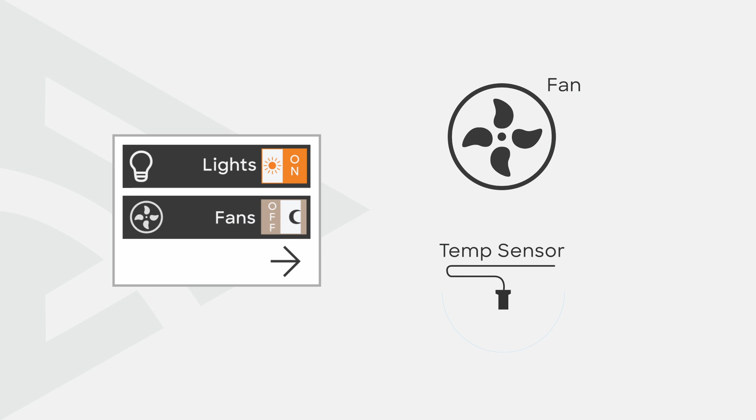By constantly monitoring the temperature underneath the hood with temp sensors, the controls will know when to lock the fans on and when to automatically turn the fans off. First, let's look at an example graphic to help demonstrate how these 4 set points work in real time.

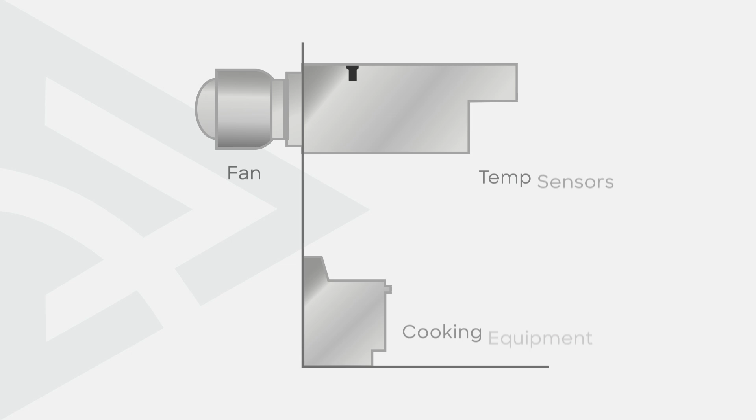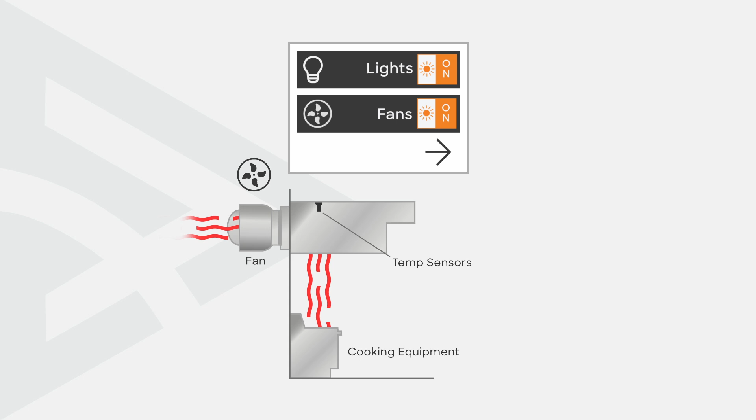Here, we see a hood with a temp sensor over a set of cooking equipment. With nothing on underneath the hood, the fans are free to be turned on and off via the fan button on the touchscreen. Once the cooking equipment is turned on underneath the hood, the temp sensor values begin to rise due to the hot air underneath the hood.

At all times, the temp sensor values are being compared to the room temperature. In this example, there is no room temp sensor, so we're going off a preset room temperature. If there was a room sensor, this value would change depending on the value the room sensor is reading.

Again, the fans are still free to be turned on and off manually by the touchscreen until the temperature reaches the temperature interlock offset. The temperature interlock offset is the difference above the room temperature in which the fans will be locked on. At this point, if fans were not already on manually, they will be turned on automatically.

Once temperature interlock is met, fans can no longer be turned off via the touchscreen. You will get a message saying fans cannot be turned off. Temperature sensors are detecting cooking temperatures. This will continue to be the case until temperatures underneath the hood cool down enough for the fans to begin to shut off automatically.

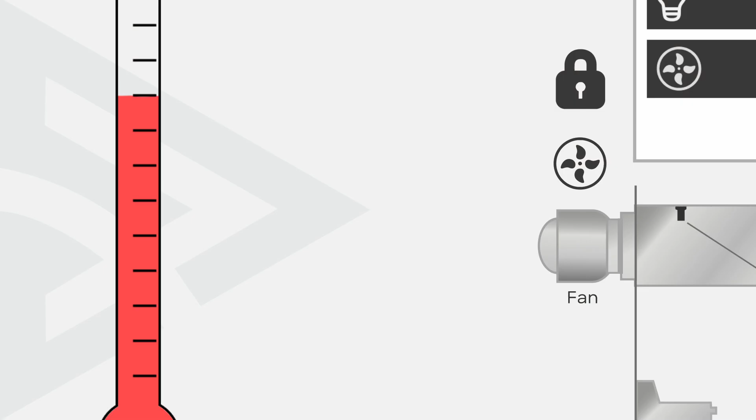How much the temperature must fall below the temp interlock set point is determined by the temp interlock hysteresis value. Temp interlock hysteresis can simply be thought of as a difference. Once temperatures go below this temp interlock hysteresis, a timer will start to shut the fans off automatically.

If at any point the temperature goes above the temp interlock hysteresis during the timer, fans will continue to be locked on and the timer will reset. Once the temperatures are below the temp interlock hysteresis for the entire duration of the timer, fans automatically shut off and will show off on the touchscreen. Once fans shut off, they can always be turned back on via the touchscreen fan button.

Now that we've seen how that works with the 4 temp set points, let's go over the scenario again showing actual values for the set points. The set point values we will be using are as follows: a preset room temperature of 75 degrees, a temperature interlock offset of 20 degrees, a temperature interlock hysteresis of 10 degrees, and a hysteresis timer set for 10 minutes.

Again, we have our example cooking setup. As equipment is turned on, temperatures begin to rise. As the temp continues to rise, they pass 95 degrees, so the fans enter temperature interlock. The fans are turned on automatically if not already on manually, and are at this point locked on and cannot be turned off by the touchscreen.

As cooking equipment is turned off, temperature begins to fall. Once the temperature falls past 95 degrees and gets down to 85 degrees, the hysteresis timer starts. For fans to shut off, the temperature must stay below 85 degrees for the entire 10-minute timer. After temperature is below 85 degrees for 10 minutes, the fans will automatically shut off.

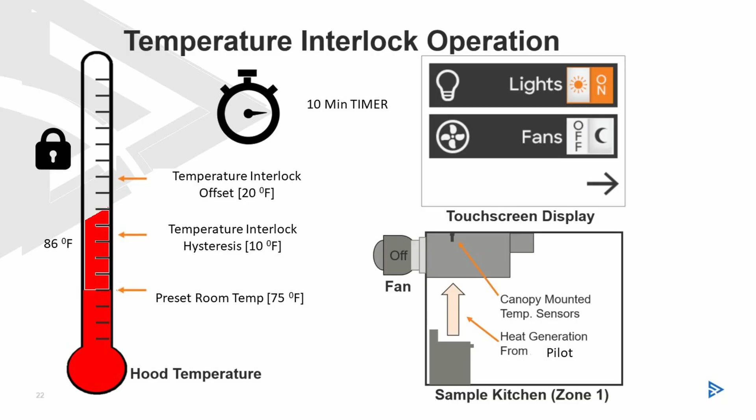Let's go over an example in addressing the fans being stuck on. In this example, we have excessive heat coming to the temp sensors even with the equipment off. Typically, this can be caused by pilot lights on gas appliances or simply high ambient temperatures underneath the hood. To see temperature sensor values, we can navigate to the temp sensor menu of the controls diagnostics.

By navigating to the menu and hitting enter on the main board, we can see the extra heat is causing the temp sensor to have an elevated value of 87 degrees. It is important to look at the temp sensor with the highest value if there are multiple sensors. Now that we know the highest temp sensor values, we can navigate to the zone settings menu to look at what our set points are set at.

Choosing Zone 1, we first enter on Preset Room Temperature to see it is set at 75 degrees. Hitting Escape, we can then go to Temp Interlock Offset. We see that it is set at 20 degrees, making our lock-on temperature 95 degrees.

Going out, we check our temperature interlock hysteresis, seeing it is set at 10 degrees. So we know that 85 degrees is our off set point. Going back out, we go to check our hysteresis timer, and we see it's set for 10 minutes.

Since our elevated temperature is keeping the temperature sensor at 87 degrees, 2 degrees above our hysteresis temperature, or fan off temperature, we need to be able to set the locked zone, or the fan off temperature, to be above what the lowest temperature our setup will allow. When making any adjustments, try to stay within a 5-degree difference from the original values, making only incremental changes.

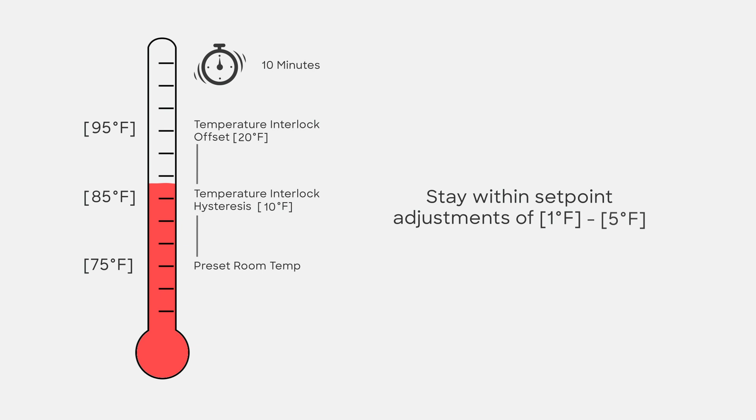Going into temperature interlock offset, we will change this from 20 to 22 degrees, making our lock-on temperature 97 degrees. This will move our fan off temperature up, but we will still go into the hysteresis settings and adjust that down to 8. This will make our off temperature 89 degrees. We will leave the timer for 10 minutes.

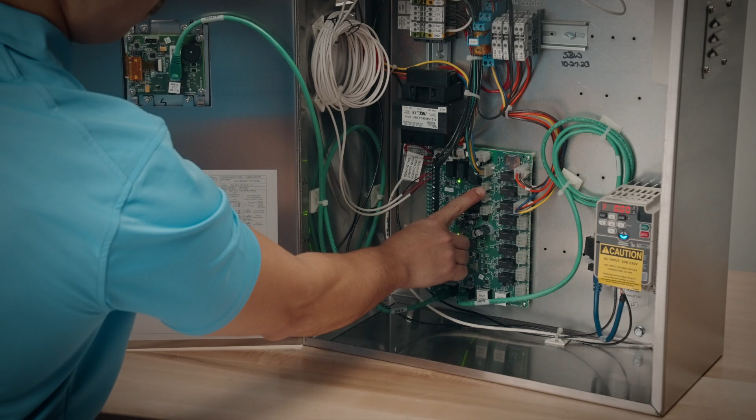Now, after the temperature sensors reach 97 degrees and are locked on, the temperature will only need to fall to 89 degrees for 10 minutes. If the temp sensor is at 87 degrees, this should be able to be met with all equipment off. Since the fans were locked on, it's best to cycle power to the controls after changing temperature settings. This will reset the temperature logic and give the kitchen control of the fans again.

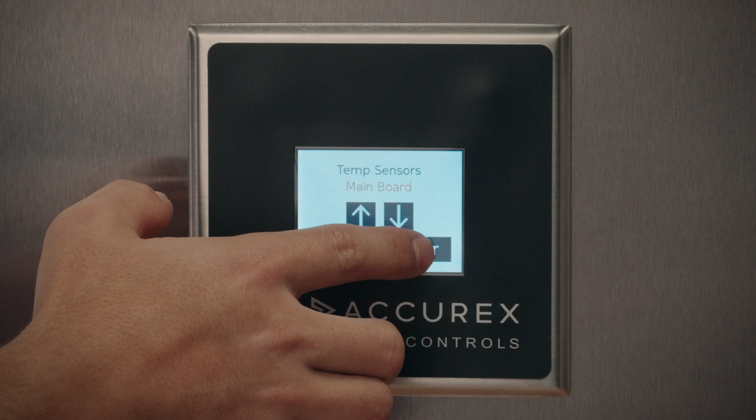Now, the second common issue is when fans shut off prematurely or during the middle of cooking. Let's cover an example of the cooking temperature causing fans to shut off during cooking. Looking back at our test kitchen, maybe during parts of the day, hood temperatures fall due to a decrease in cooking load. Going back into diagnostics, we can see that the highest temperature sensor value during this lull is fluctuating between 82 and 84 degrees.

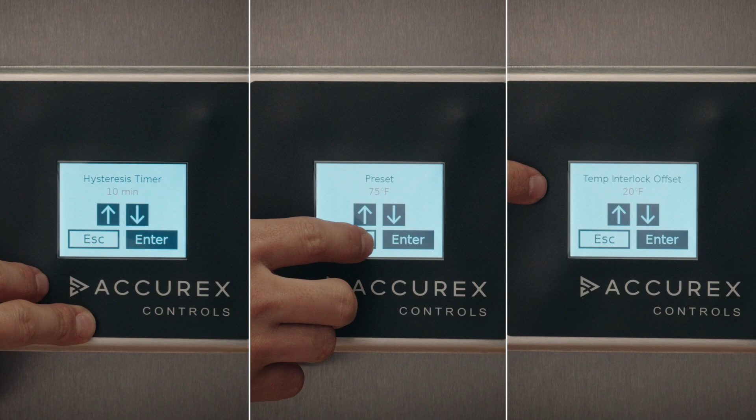Knowing this, we will again go into zone settings and check out our set points. Note that they are the same as the previous example. As we can see, during the lull in cooking, the fluctuation of the highest temperature sensor being between 82 and 84 would put us below the fan off temperature of 85. And if this should stay like this for an entire 10 minutes, the fans would automatically shut off, requiring them to be turned back on from the touchscreen manually, or for the temperature to rise above 95 for the fans to turn on automatically again.

To resolve this, the goal would be to get the fans to shut off automatically only after all equipment is properly shut off. To accomplish this, we would want the temperature off set point, or the temperature interlock hysteresis, to be below temperatures we were seeing when half of the cooking equipment is off. Like in the last example, we'll want to only make incremental set point changes within 5 degrees of the prior values.

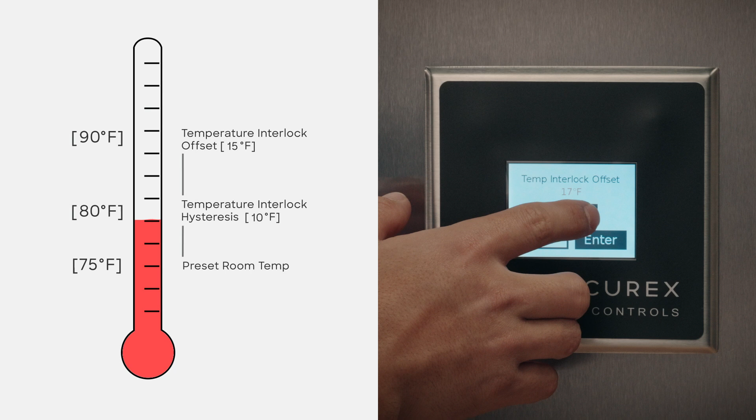First, we'll go into temperature interlock offset and turn this down to 15 degrees, making our fan lock-on point be 90 degrees. Since our hysteresis is still set at 10, this would put our fan off set point at 80 degrees for 10 minutes. This adjustment should be enough to keep their fans on until they have finished cooking or all equipment is off.

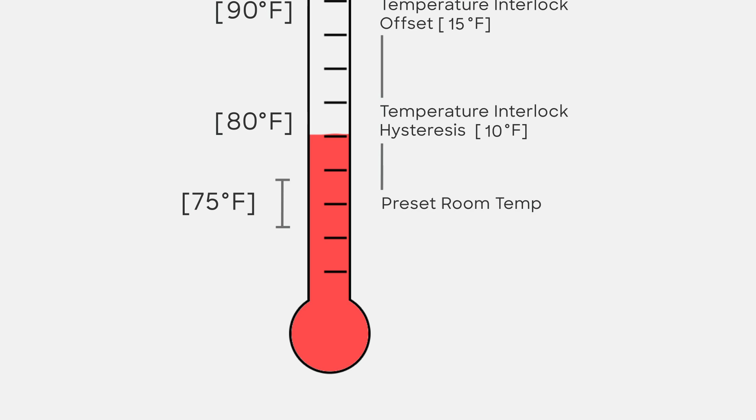In both of these examples, we used a preset room temperature set point. If your controls came with a room sensor, the room temperature set point will fluctuate with the reading on the room temperature sensor. All temperature sensor values can be checked in the diagnostics menu of the controls. In both examples, we were able to go into diagnostics and check temperatures during the points in which our problem was being experienced. This is always the recommended method, as you will be able to perfectly set the temperature settings according to your situation.

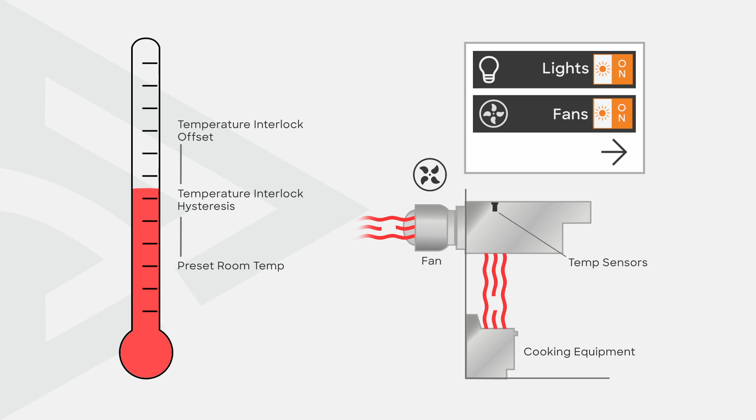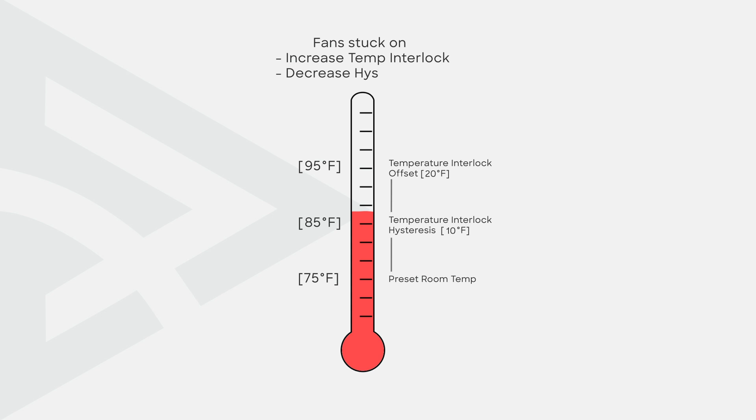Here are a couple general recommendations on quick fixes for fans being stuck on due to temperature, or from fans going off too early due to temperature lulls. As a reminder, we want to keep temperature set point adjustments between 1 and 5 degrees. For fans being stuck on, we can always slightly increase the temperature interlock offset set points and/or decrease the temperature interlock hysteresis.

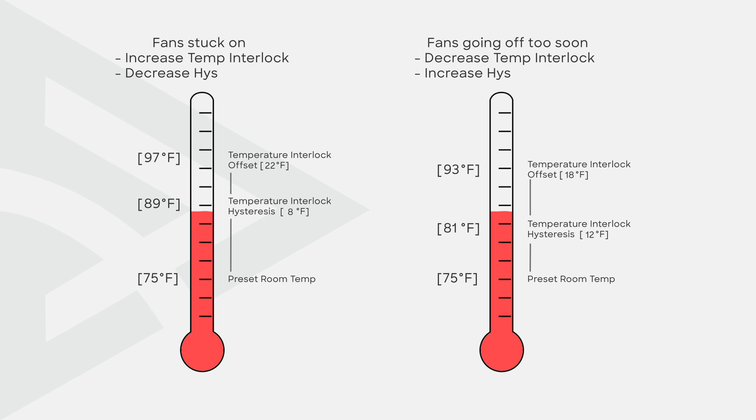For fans shutting off before cooking is done, it's best practice to turn fans on manually rather than rely solely on the temperature interlock. Otherwise, we can decrease our temperature interlock offset and/or increase our temperature interlock hysteresis.